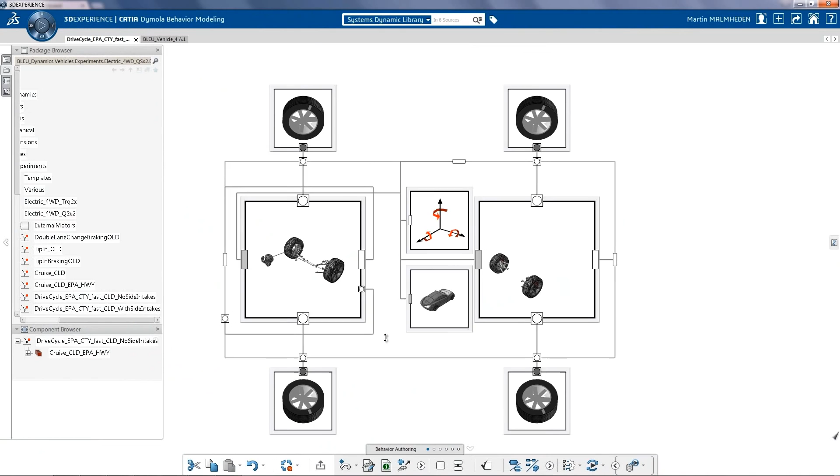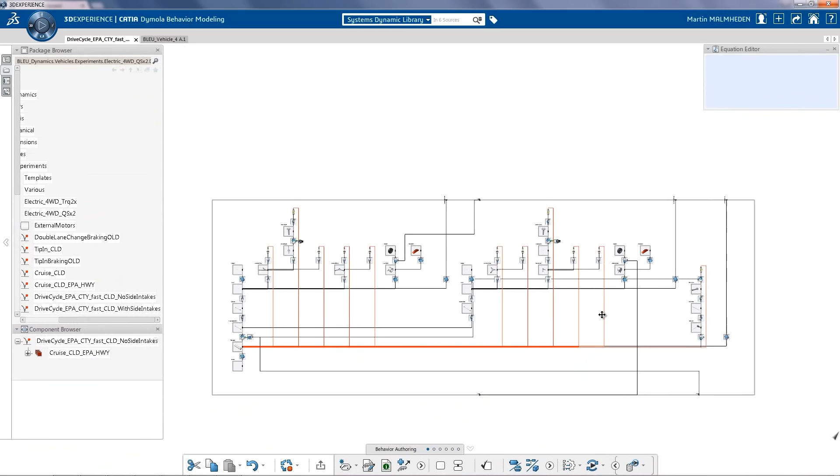Thermal evaluation. In order to assess driving performance, energy consumption, as well as thermal management of the car, the system engineer uses CATIA Dymola Behavior Modeling app. The vehicle behavioral model is structured with all components such as mechanical suspensions up to the very detail of the joints and 3D parts. Not only the mechanical, but the electrical, the electronic, hydraulic or thermal and control characteristics and components can be modeled with Modelica language.

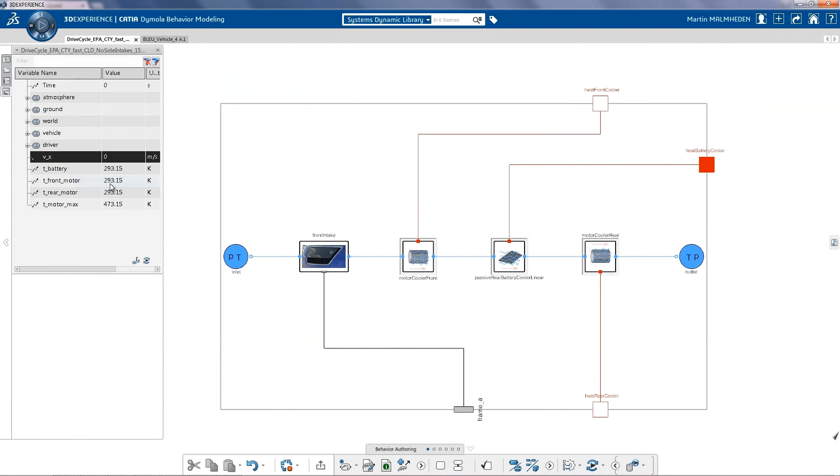Let's have a look at the electrical motors on the driveline. Here in the sport car, we have developed two electrical motors, one for the front and one for the rear. Not only has the electrical been modeled, but also the thermal aspects of the vehicle. Here we can see that we can get air from the front to cool down the front motor, the battery, and then the rear motor in a single stream of air cooling.

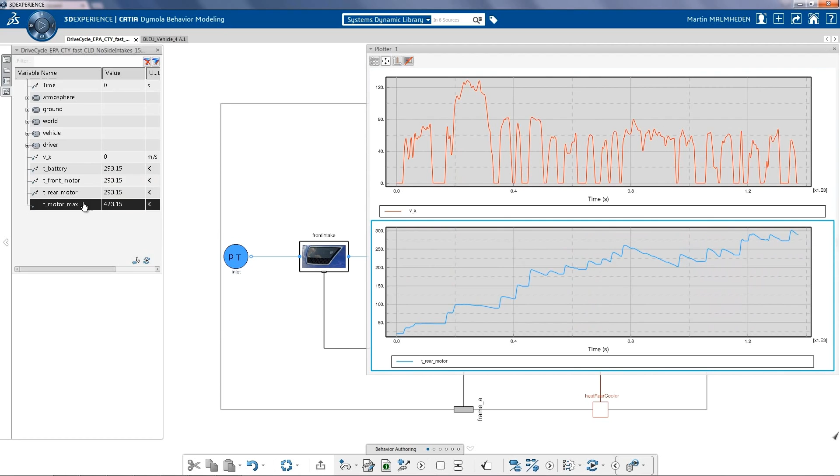If we perform a sport drive cycle, we can then really assess what are the temperatures in the different components, as well as the driving performance. Here we can see at the rear of the car that the rear motor is getting too hot towards its specifications.

New requirement. Brainstorming between systems engineers, designers, and mechanical engineers is managed through an innovation pipeline. To solve the heat issues in the high-speed drive cycle scenario, a solution is proposed. Fresh air will come from side inlets in order to cool down the motor with additional cooling equipment.

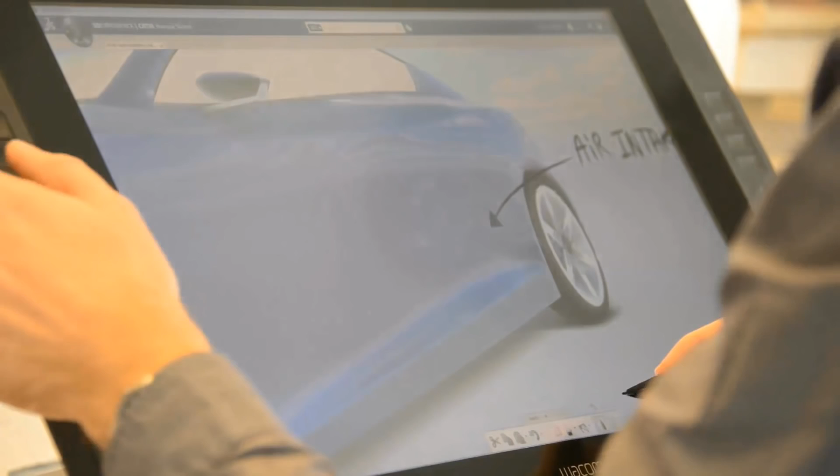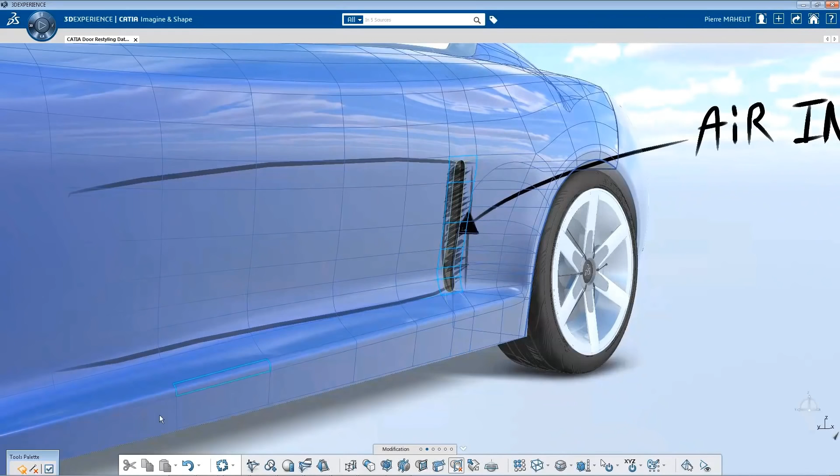Design changes. By using the 3DEXPERIENCE platform, the Creative Design Studio is connected with the rest of the company, and the team is using applications from the dedicated creative designer and Class A modeler roles to create the new design. By using 3D sketching on a tablet, the creative designer can quickly outline a new idea by sketching directly on the existing 3D geometry. Here, for example, he develops the needed air intake.

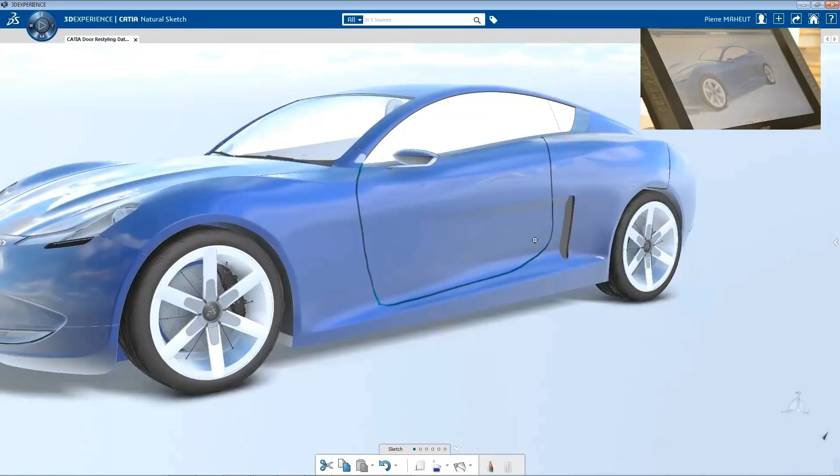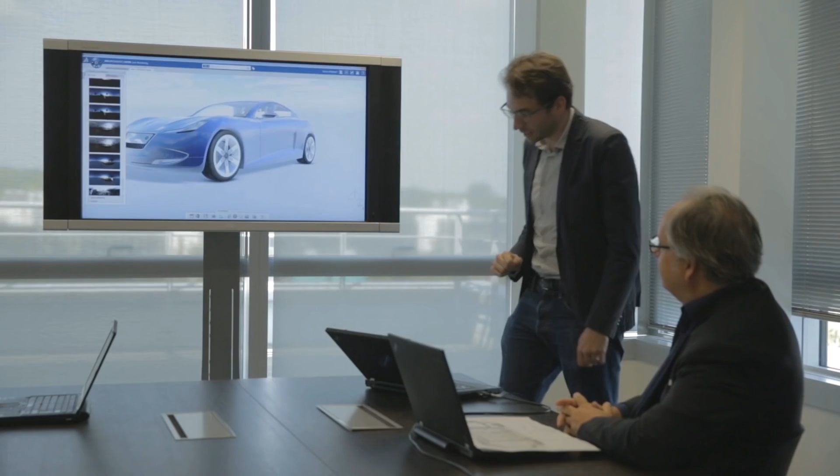Then, by using virtual clay modeling with subdivision surface modeling, the designer can quickly define and see the new shape of the design. The same can be done for the door cutting line and associated gaps. First, the designer sketches the design intent directly on the 3D model and then applies an automated gap feature from CATIA ICEM. By replacing the different sketch ideas that update the gap feature line, the designer can then quickly study the different design alternatives for gaps.

Finally, working in a real-time, high-end visual environment with the CATIA Live Rendering app, the design manager can compare the different new design proposals for final design validation.

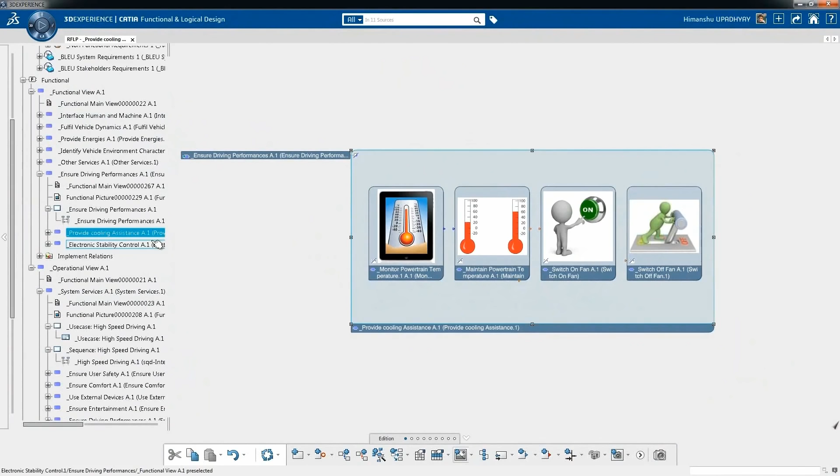Vehicle architecture. In parallel with styling changes, additional technical functionalities for Cooling Assistant have been added in the functional architecture to satisfy the driving performance needs at high speed. This additional Cooling Assistant technical function is decomposed into allotted elementary technical functions with parameters, such as the monitoring of temperatures and switching on or off of the cooling system. These technical functions are sequenced in a scenario. A cooling system has been added in the components architecture with allocated technical functions to provide fresh air inflow from the newly introduced side air intakes for cooling down the rear motor.

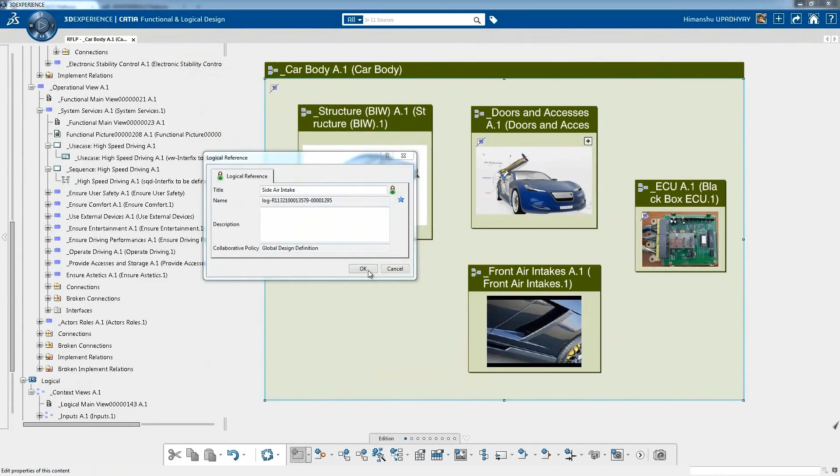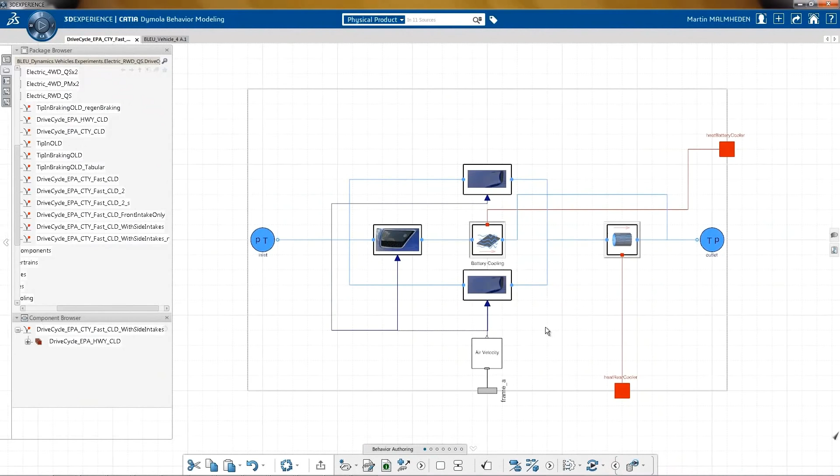Cooling system. Based on this new system architecture, the thermal models for the cooling system have been developed. Here we can see that the two side intakes directly cool down the rear motor. Let's have a look at the efficiency of our new design. Based on the speed of the car during the drive cycle, we can quickly assess the temperature of the battery and the rear motor.

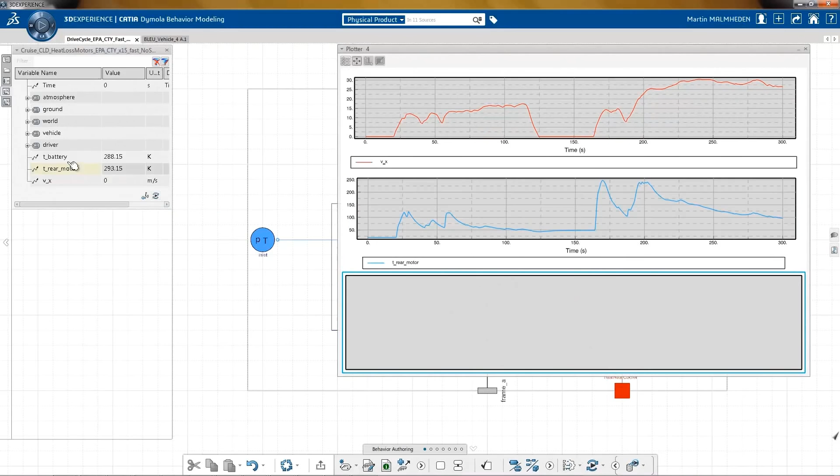First, with the previous solution, we can see that the rear motor temperature is getting up to 200 degrees. Now, with the new solution, let's have a look. As you can see, the rear motor is cooled down and 200 degrees are not reached.

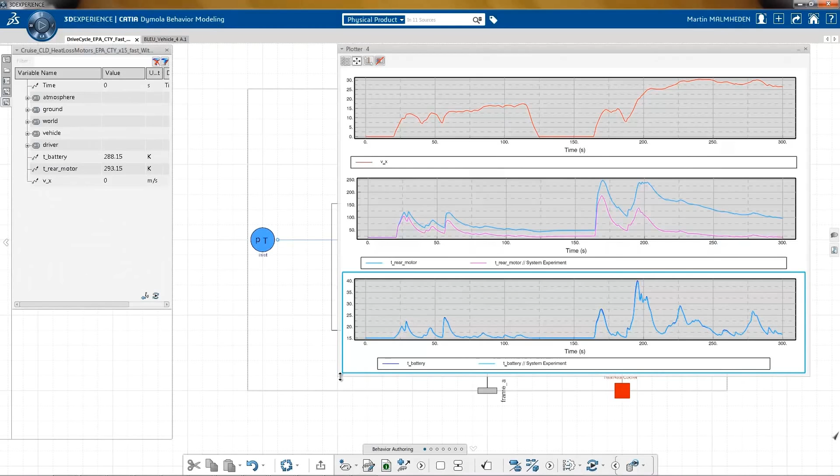Play the experience. This demo has illustrated how impacts from system architects, thermal experts, and designers can be validated together, taking into account their respective requirements while keeping the global product definition as the unique objective.